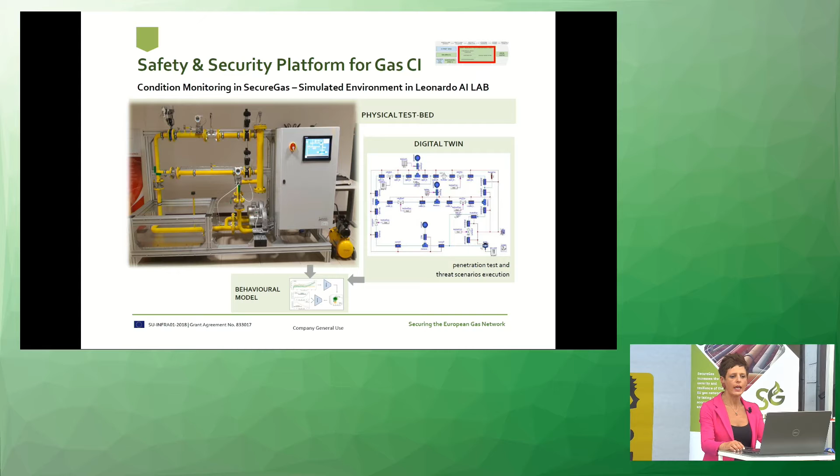That's all on my side. I hope we have more occasions to go deeper into this very interesting topic. I leave the floor to Paolo Corvaglia from RINA for a focus on distributed acoustic sensing. Thank you for your attention. Thank you very much, Rosanna.

So I will briefly talk about the DAS system, which is the acronym for Distributed Acoustic Sensing. We are talking about a distributed monitoring system, which means that the physical parameter of interest is measured virtually at each point along the sensor.

The sensor in this case is an optical fiber, a standard telecommunication optical fiber, which is laid down for tens of kilometers along the pipeline, and which is converted by the DAS technology into an array of thousands of virtual microphones, allowing real-time monitoring of acoustic events happening close to the fiber.

Which is the physical principle behind it: the interrogator injects a pulse of light into the fiber. Then the sound waves, which are actually pressure waves, locally deform the optical fiber, inducing very tiny changes to the light path. From the analysis of these changes, we can trace the features of the acoustic event which caused the perturbation.

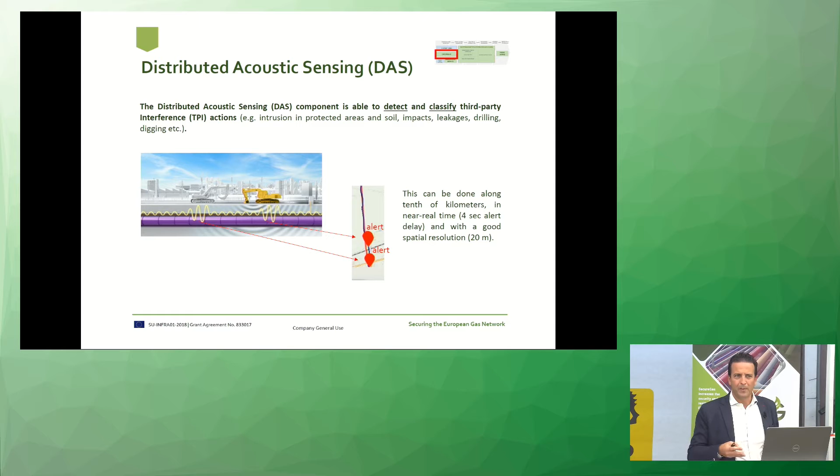Good afternoon, everybody. I'm Francesca Iuele, and I'm going to talk to you about the geohazard assessment component.

Then there is the so-called hindcasting model definition, and in this phase first the rainfall thresholds are defined. A rainfall threshold is an empirical law aimed at identifying a critical rainfall, one that can produce a landslide event. In this stage, we also define the possible landslide propagation scenarios based on the hydrological model of the area at study.

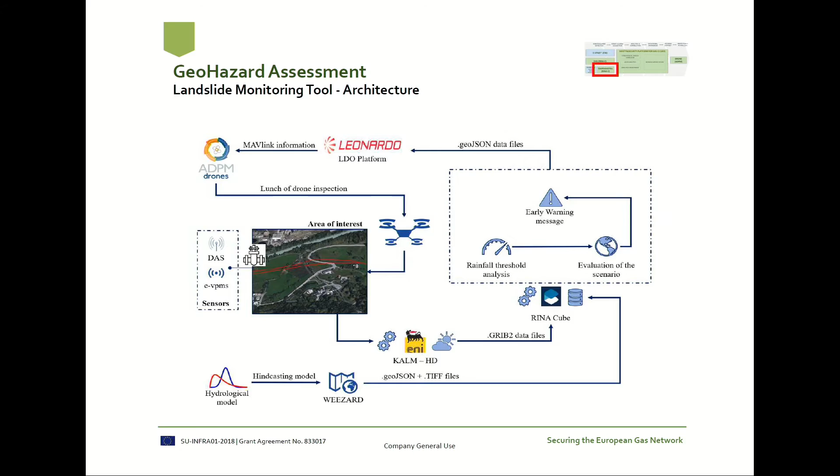So this was the architecture of the tool at a glance. I thank you, and I leave the floor to my colleague for the next part.

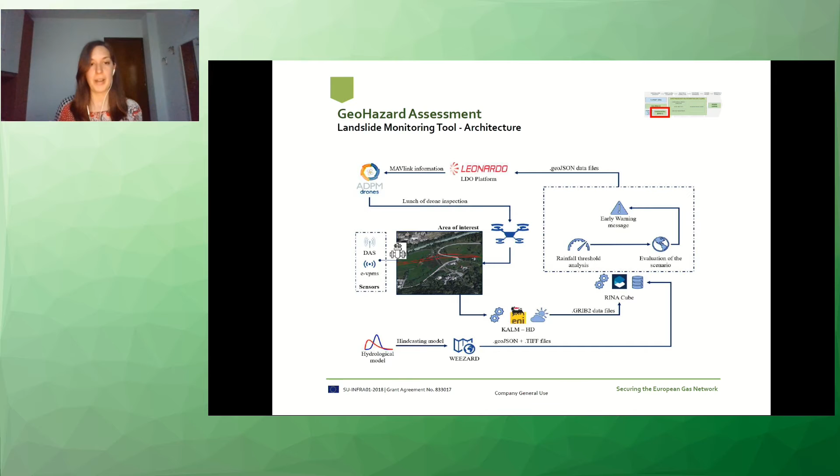Hello, I'm Luca Brizzi from ADPM Drones, and with the next slides I'll quickly present the solution for the automatic drone management system developed by ADPM Drones.

As you know, drones can be used efficiently in multiple scenarios that we have divided into some macro areas like safety, telecommunication, insurance, infrastructure, and agriculture, and we can summarize them as monitoring and safety.

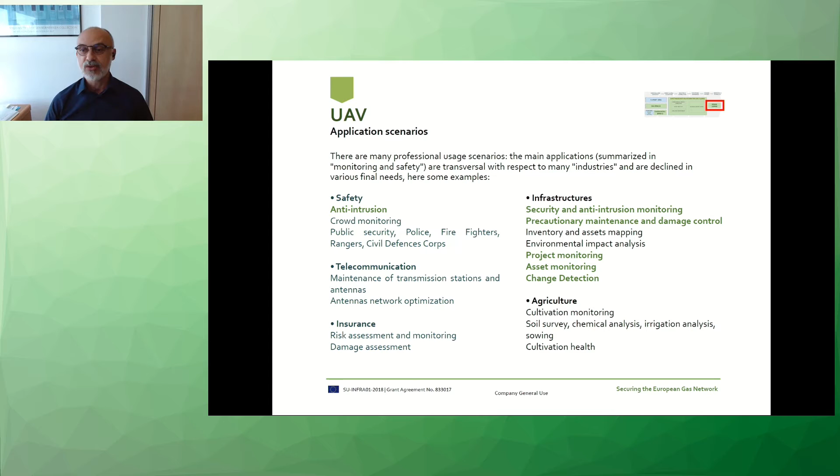For the SecureGas project, drones are used for the operational scenarios highlighted in green here, including security, anti-intrusion, and asset monitoring.

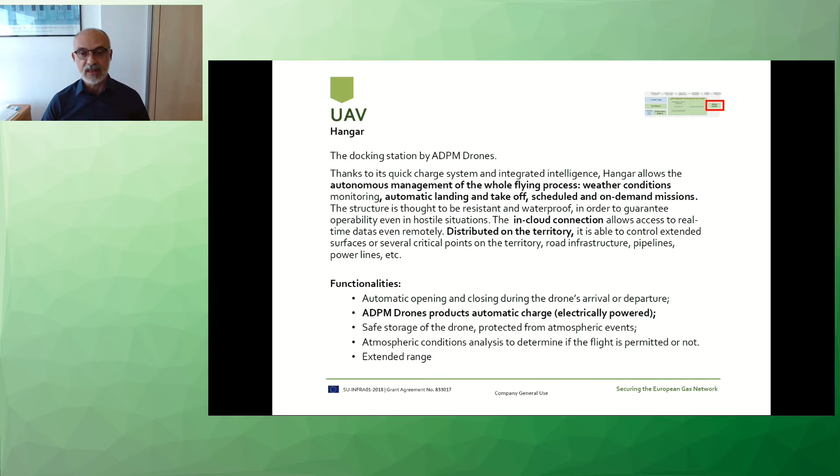Thank you. Behind the hangar system, there is a communication architecture, both with satellite and terrestrial system, and data management that allows its integration in the different operational scenarios and the business and application procedures.

Thank you very much. Hi everyone, I'm Simone Cesari and I represent with my colleague Giuseppe Giunta Eni in this SecureGas project, Business Case 3.

First of all, I'd like to spend some words about the pipeline where we are deploying the SecureGas infrastructure. We are in northwest Italy between Chivasso and Aosta. The gas pipeline is more or less 100 kilometers long with an internal diameter of 16 inches. The pipeline was formerly used to transfer crude oil, but after 2015 it has been inertized and filled with nitrogen at about 6 bar.

For SecureGas business case, we have subdivided this pipeline into two sections. The southwest section we have used for the scenario of third-party interference and leak detection. The northern part, towards Aosta, has been used to host the geohazard scenario.

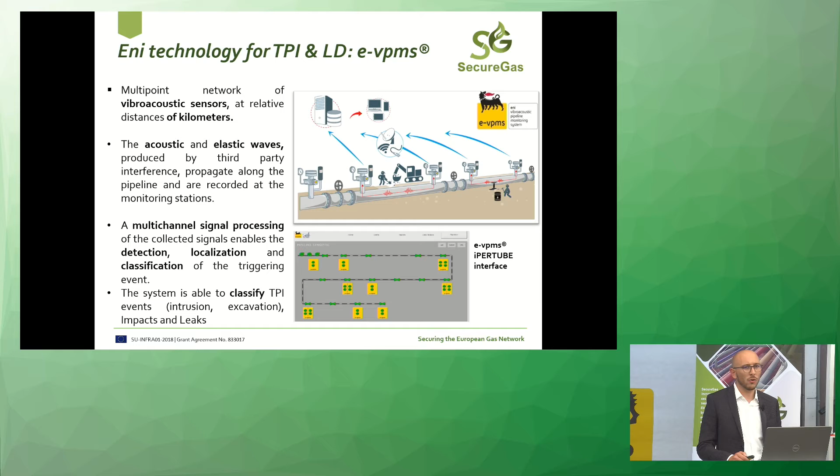What is important here to see is that e-vpms is able to detect and classify the event we are talking about. So the e-vpms is able to say if we are experiencing an intrusion, an excavation, or an impact, or even a leak. The second technology here I would like to show is Eni Kassandra Meteo Forecast.

It is a high-definition model for northwest Italy. It is a 60-hour forecast model, and the model is able to predict temperature, wind, and precipitation, and of course correlates this forecast with the data measured from public stations and also from two weather stations that we installed here in Chivasso and also in Aosta. The weather forecast files are transferred to the RINA geohazard component for the geohazard assessment.

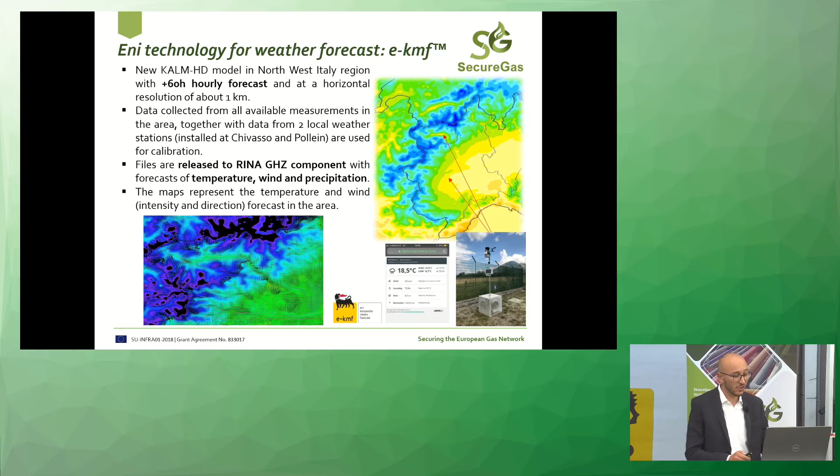Okay, business case 3 has been developed in 4 stages. After a feasibility phase, we had a calibration phase. So we performed a first test campaign last October in order to acquire some data and to calibrate the field layer system. Then we validated the results in a second test campaign. We brought on the field all the components that my colleagues previously explained. And here today we are going to see the live demonstration of the full-scale scenario for TPI and leak detection.

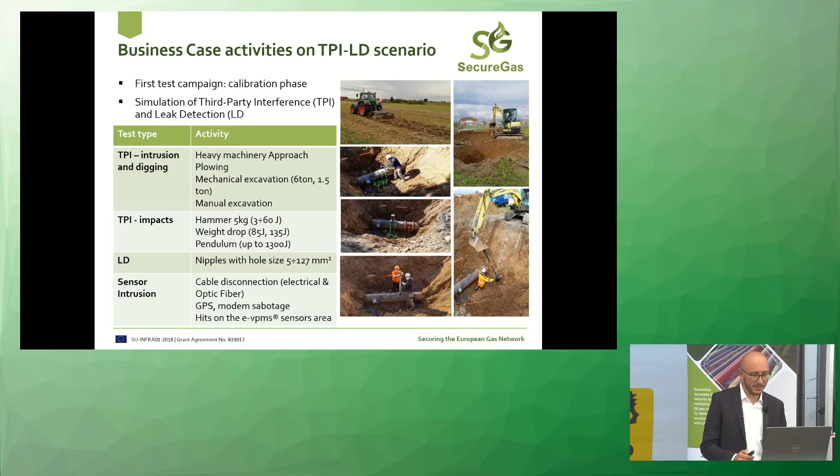Okay, this slide. Let us see what we are now going to see at the test site. The first event will be the excavation, and afterwards the pipeline is exposed, so we will perform a pendulum impact directly onto the pipe, and the third event we will show will be a controlled leak. I didn't say before that a leak could occur in case of corrosion of the pipe, of course, but also as a consequence of the impact. So we will see three different events with different severity.

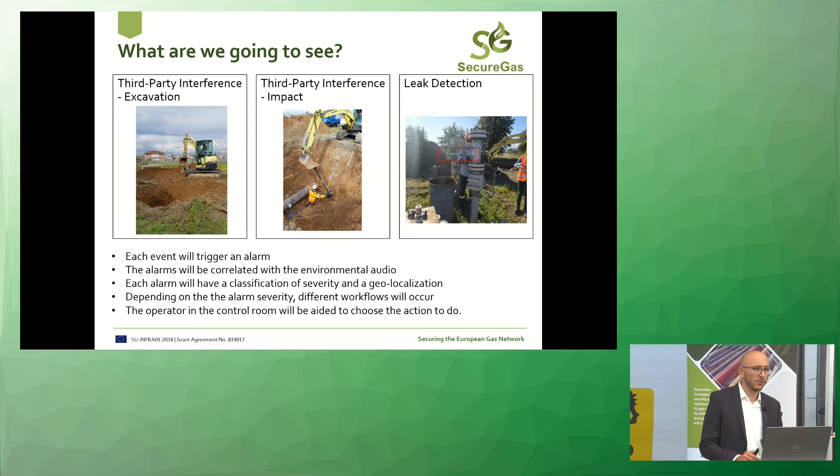Each event will trigger an EVPMS alarm, and the alarm will be correlated with environmental audio and also the alarms coming from the DAS system. All these correlated events will go through the DSS system with the classification of severity and also a geolocalization. Depending on the alarm severity, different workflows will occur, and my colleague who acts as an operator in the control room will show afterwards the possible actions to choose.

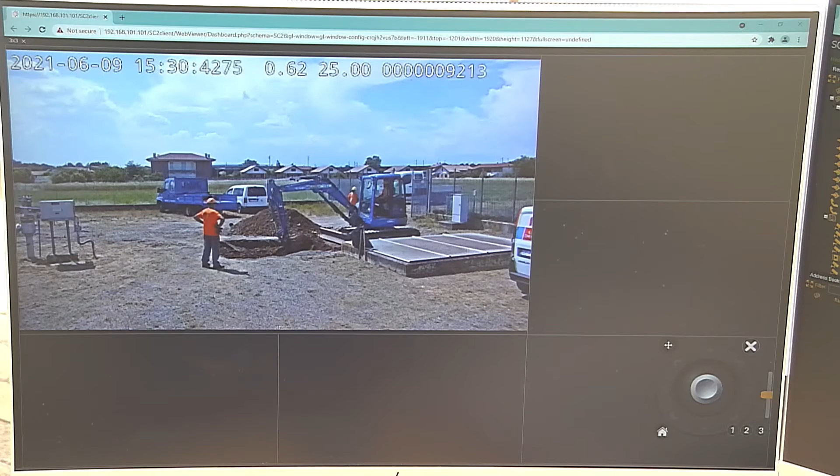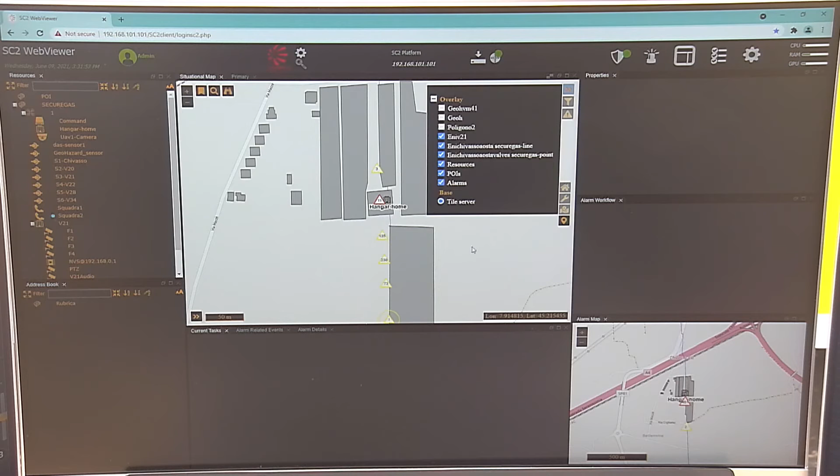You can see that the system is able to collect the events coming from the field, arriving on the screen, and collapse depending on the zoom of the map. Clicking on the collapsed alarm information, you can see all the events on the map.

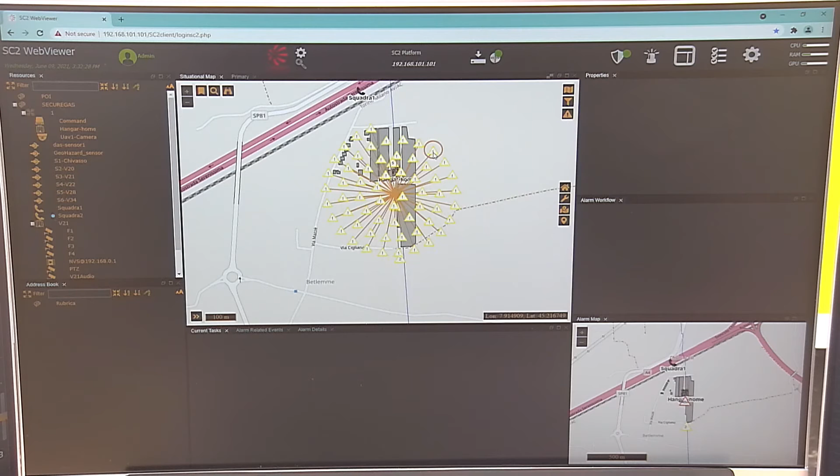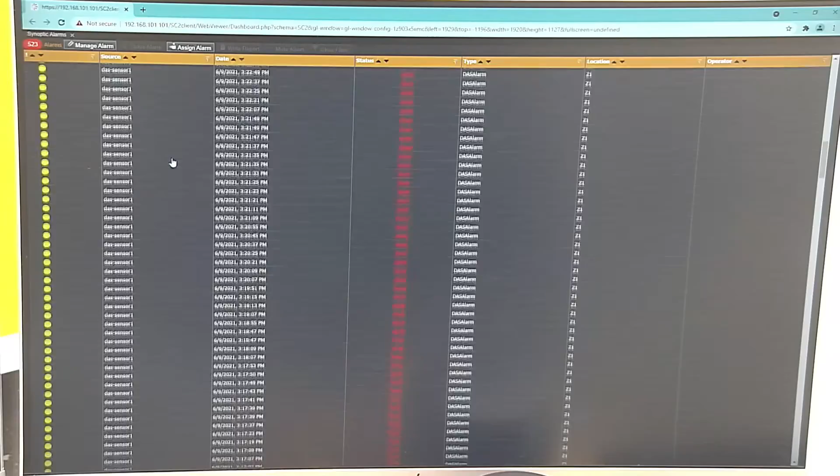The same information related to the events is available on the right screen, screen 3, and you can see different events coming from the field. For this simulation, we take into consideration 3 different types of event with different critical levels. We have the yellow bullet, the events that are not critical at all.

We have the orange with critical level number 3. That means you have a situation that you have to manage, but with a probability of attack that is in principle low. After that, you have critical level 1, where you have a high probability of attack, and the bullet becomes red.

In our simulation, the excavation is orange, critical level number 3, while the impact and the leak situation are critical level 1.

You can select the color of the critical level of the alarm, so you can see the different events as a function of the date, in terms of last date, or in terms of critical information, or in terms of status, because the operator has the information related to the status.

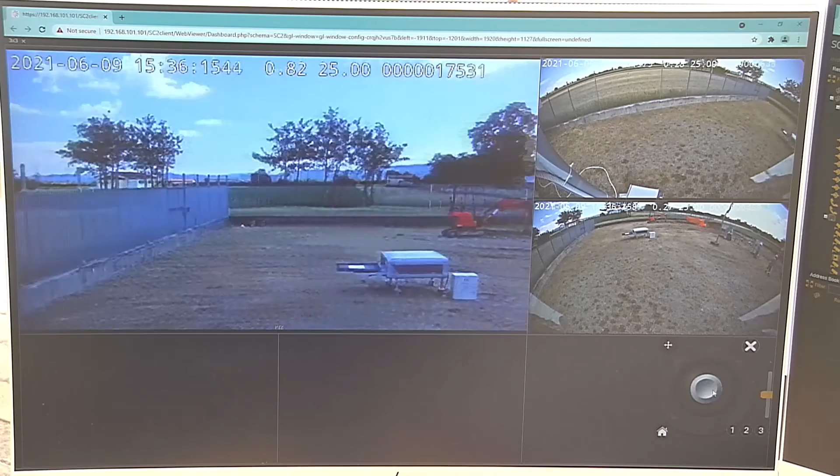On the left side, the third screen, the operator can see the cameras selected directly from the resource tree, and can drag and drop a fixed or PTZ camera or a camera coming from a drone. For the PTZ camera, the operator can manage it directly using a virtual joystick on the screen, or in other applications we use an external joystick on the PC workstation.

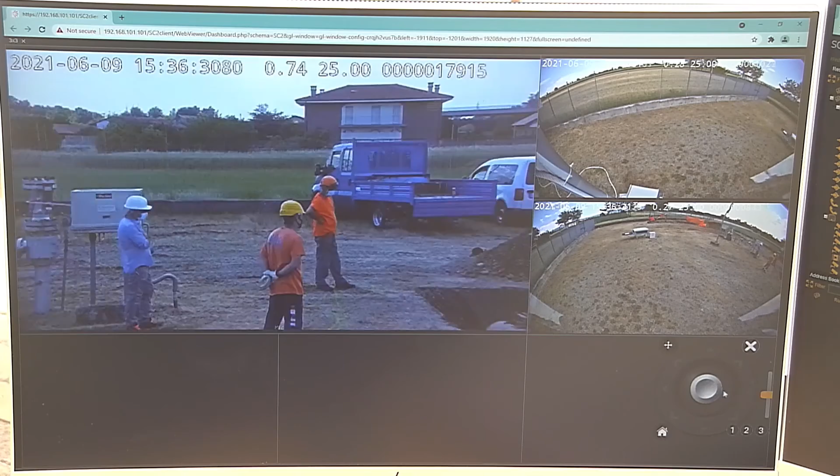Now we introduce the last element of the system, our mobile solution that we saw in use in the first scenario. This solution is a mobile application that in this configuration we use on a tablet, shown on the screen. The app supports login on the system, so only people with the right level of functionality can work with it, and the people on field can manage cameras, see maps, manage workflows, and send alarms.

In terms of cameras, people can see different cameras, and clicking on a camera, they see it directly on the screen. If the camera is a PTZ camera, the operator on field can select the PTZ setup and change different PTZ positions, like in this example, and then come back to the home configuration.

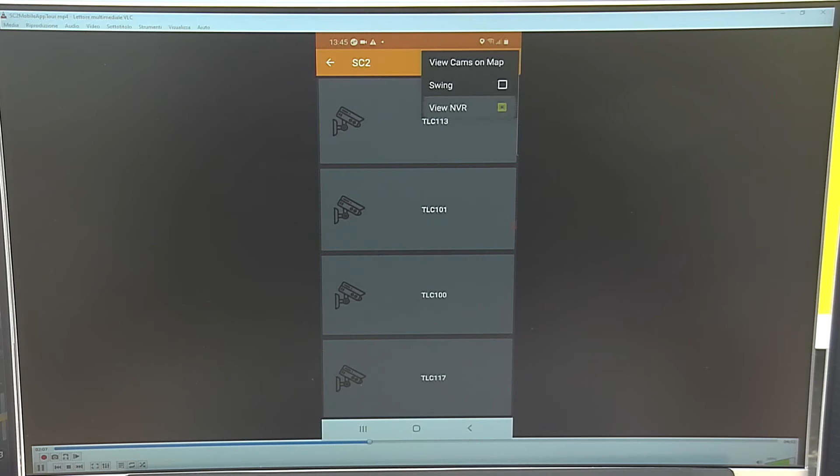Moreover, the operator can see recorded camera footage in order to analyze the situation from the field directly on cameras recorded by the system. Now we can see this configuration.

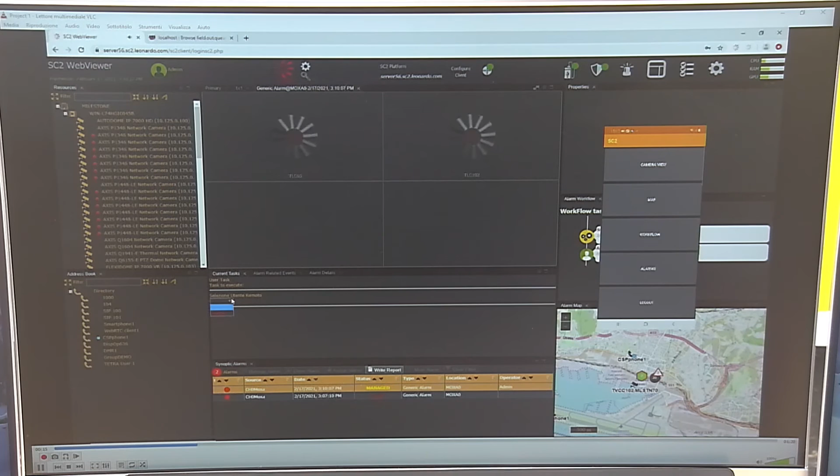Moreover, we see the configuration of the workflow managed by the operational center and the remote subscriber. In this example, you can see the alarm coming into the operational center, and the operator takes charge of the alarm and starts to manage it.

We open 2 cameras and receive the alarm, and you can see that the operator can analyze where the alarm is with respect to its position. After that, it can send the alarm and manage it in a simple way.

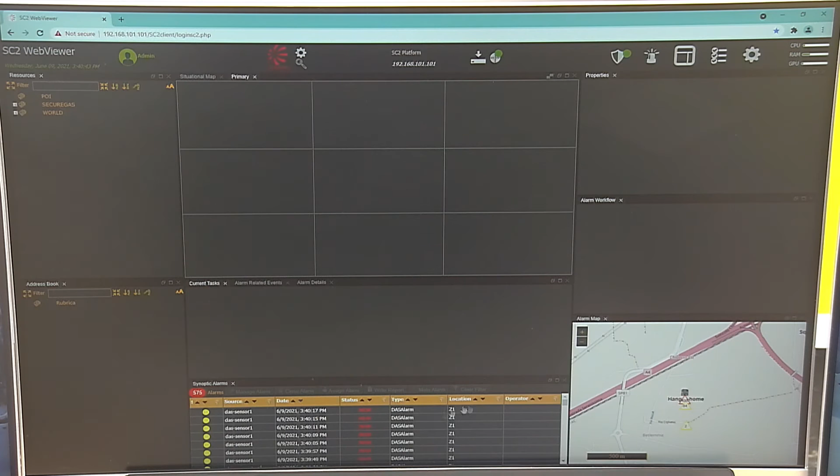Now, sorry, we are waiting for the alarm that has to come from the field.

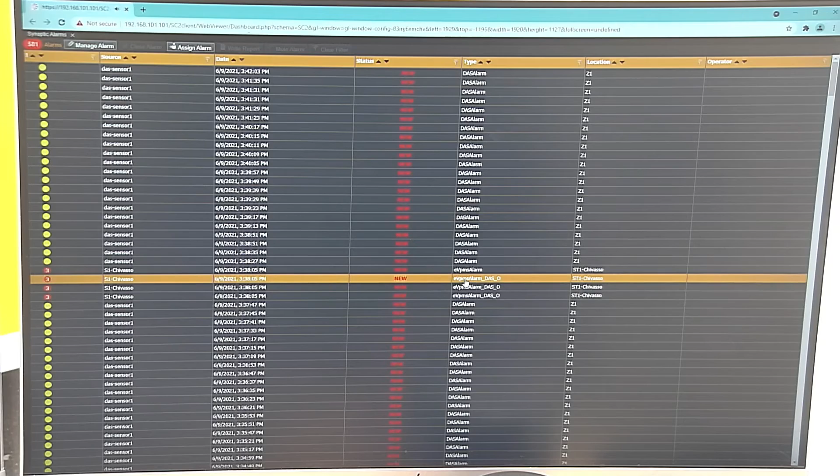Now we are analyzing the first business case, where we have an alarm coming from an excavator, and you can see that the alarm level is 3, and we take charge of the alarm. You can see the type of alarm on the central page of the operator, and the operator can take charge of the alarm and start the workflow to manage it.

At this point, in this simulation, we are working with the remote operator moving on field, which in our example is called Squadra 1. We take charge of this alarm, and after that we select the people on field in order to start the collaboration with the remote operator.

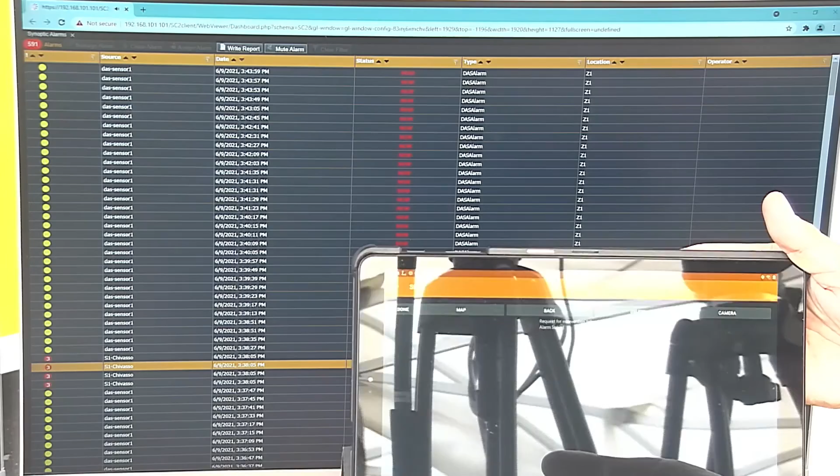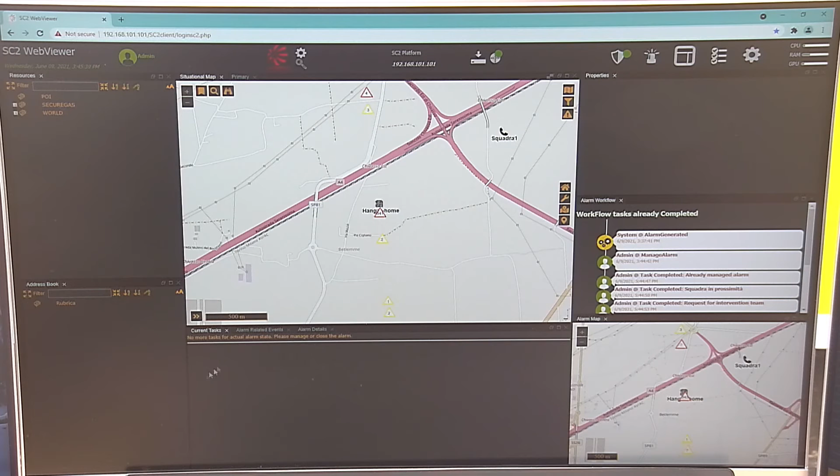The operator received the notification from the Android system. After that, you can manage everything and perform all the activities that are requested from the operational center, and we receive the acknowledgement. After that, you can see on the main screen that the activities are performed by the team on field. So the operator can stop the activity and finalize the workflow. We can close the activity.

Otherwise, if you analyze with the camera and it seems no alarm is present, you can proceed with the workflow. Now we ask to close the valve on the north side and south side, in order to avoid any type of issue on the pipe. You ask for the depressurization of the system in order to avoid explosion or similar. And the last point, we start to use the drone in order to support flying video surveillance.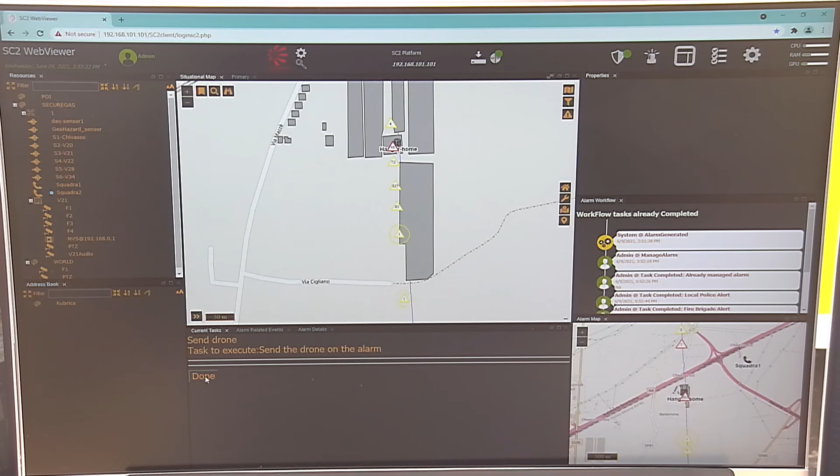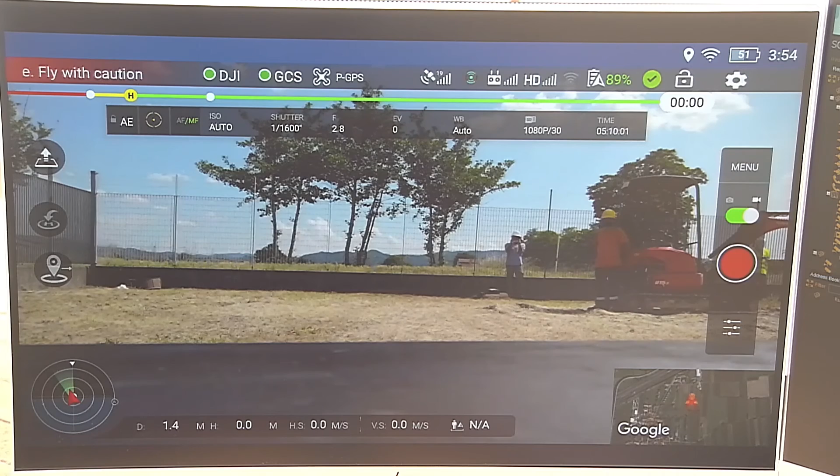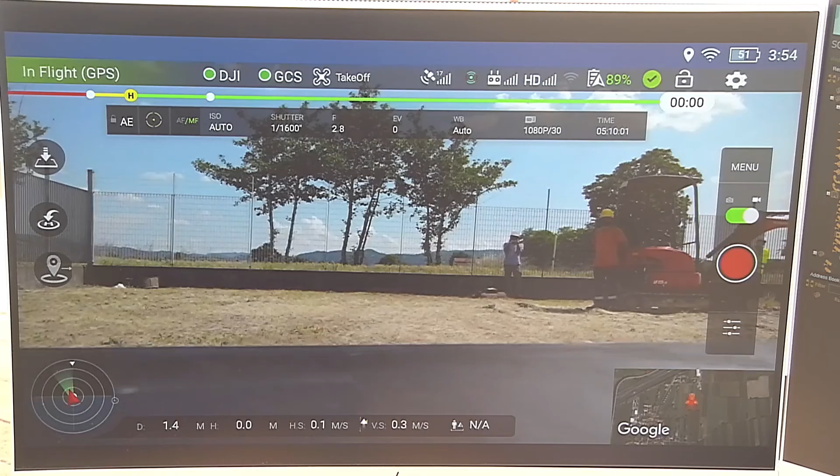We ask the drone system to send a drone to the alarm point that we received from the field directly. And now you can see on the screen the drone that opens the door of the hangar and is moving through the endpoint defined by the workflow, using the coordinates provided by the alarm itself.

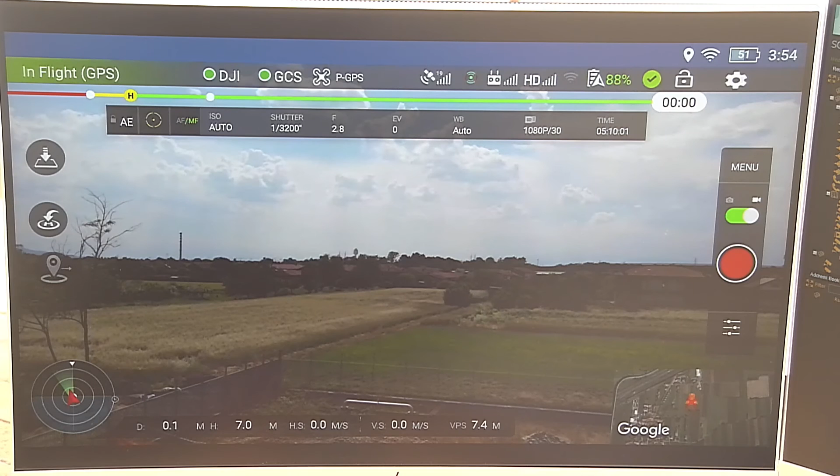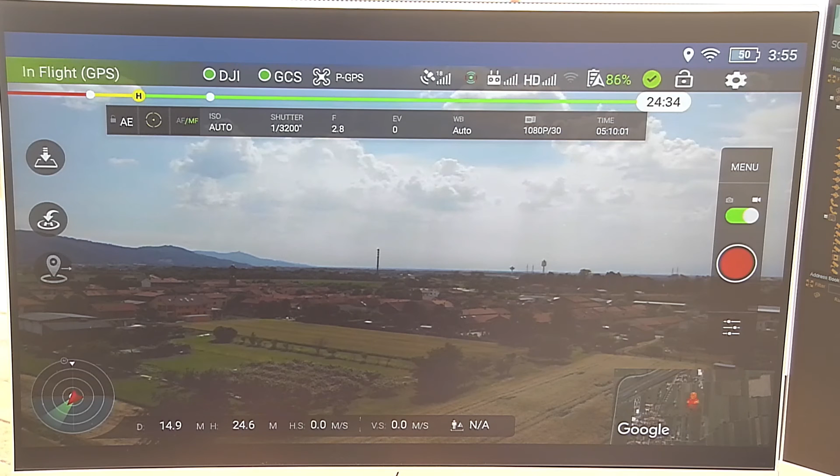After that, you can see in the situational map. You see the alarm and you see the drone icon that is moving, arriving on the final target. After that, when you arrive on the final target, the operator directly on the site or directly on the dashboard can move the camera in a horizontal way or in a vertical way in order to analyze the situation in large field of view or in short field of view.

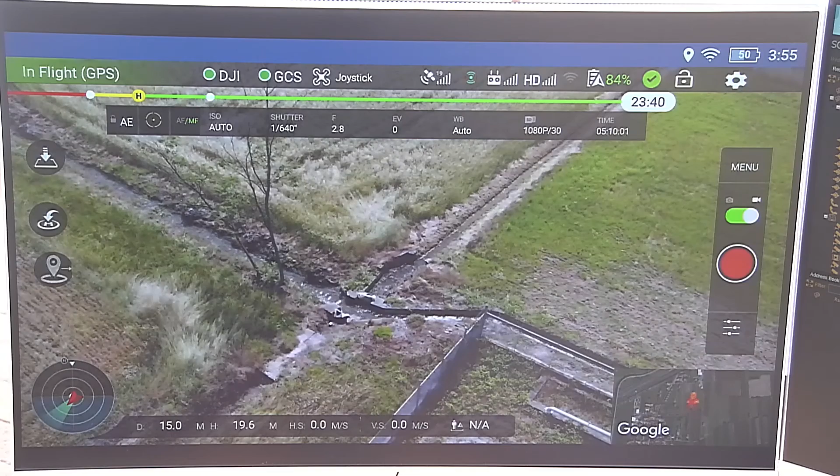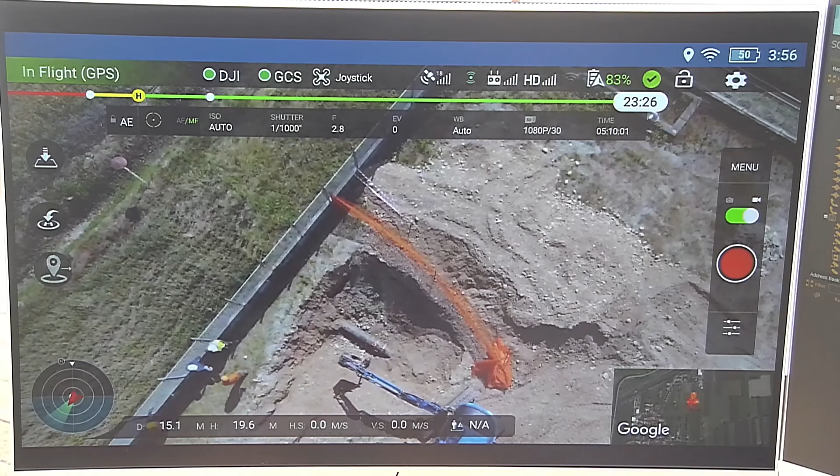Now we are analyzing the large field of view. In that way, we can see if someone is moving away from the target and trying to go to some hidden place. Otherwise, I can move in a vertical way. I can analyze what really happens on the target directly from the vertical side.

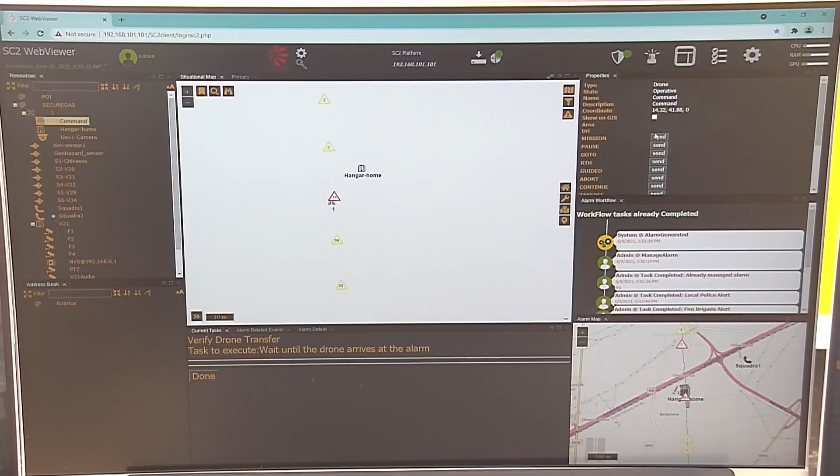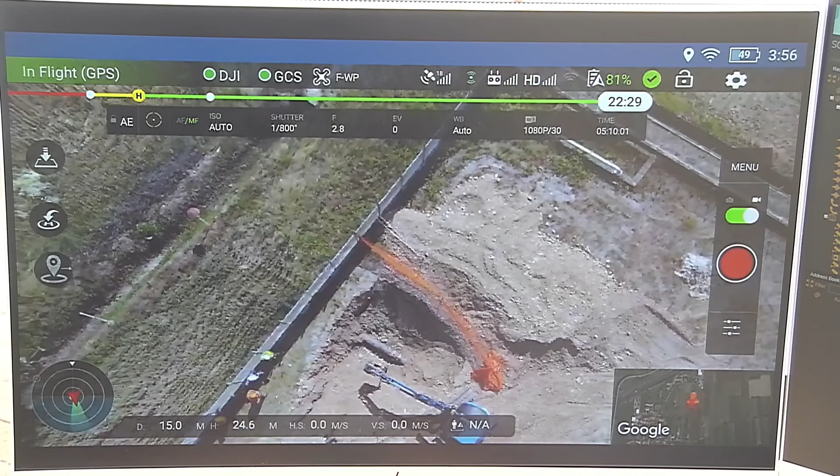When I finish analyzing the situation, I can send the drone to start a mission. The mission in that case is a simple round trip around the site. In that way, I can control continuously if someone is present or moving around the site. And during the mission, I can move the cameras again if I want, horizontally and vertically, in a long field of view or short field of view.

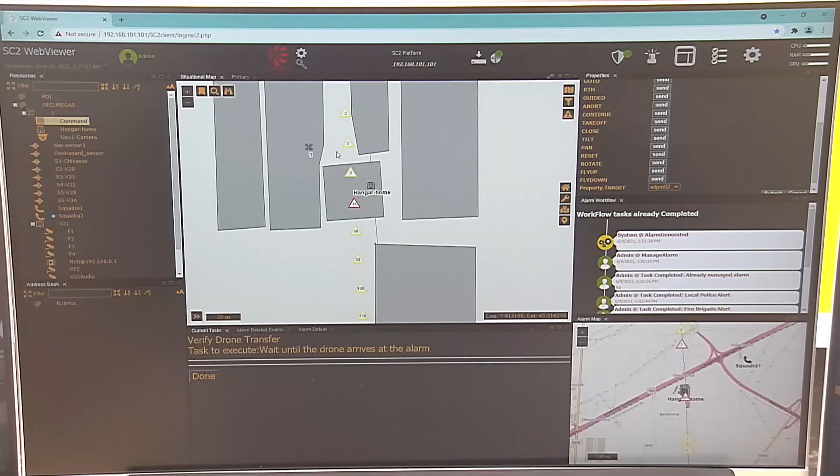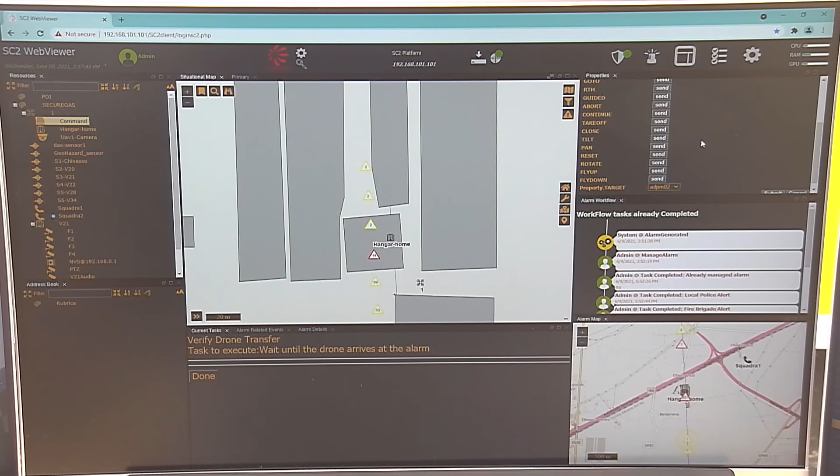And after that, when I finalize all the analysis on field, I can decide to stop the mission of the drone and ask the drone to come back to the hangar. If you want to come back to the hangar, please. In any case, you see on the map the icon of the drone moving around the point of interest. For your information, all the coordinates related to the trip of the drone are stored in the operational center in order to be analyzed during the investigation and verification phase in post-analysis.

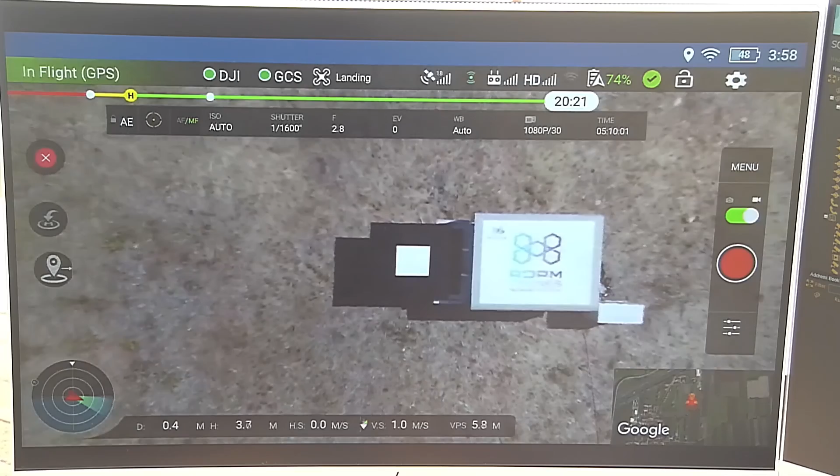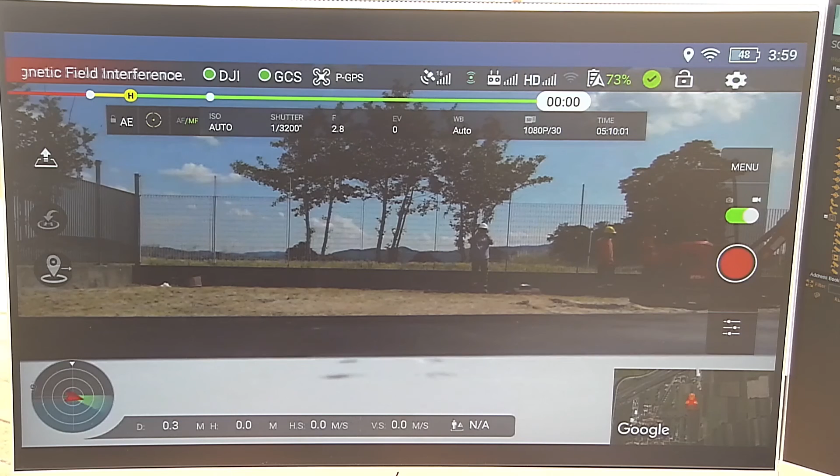Now we are stopping the mission, and you can see the drone going down to the hangar. The drone is landing in this moment, you can see on the screen, and in 1-2 minutes we can see the hangar closing. When the drone arrives in the hangar, the operator can close the workflow and finalize the management of the alarm.

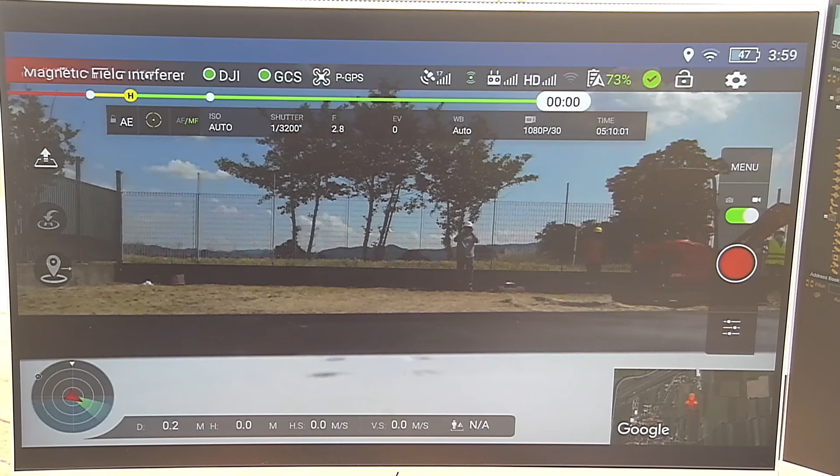And now we are going to see the third type of event. As I described before, it is a leak simulation event. And now the camera is approaching the valve. The operator is opening it in a few seconds.

Okay, we just hear the noise coming from the gas, the nitrogen, so we are in a completely safe condition. It lasts 1 second, just not to decrease the pressure. So now we have, let's say, some time to wait for the processing of the system.

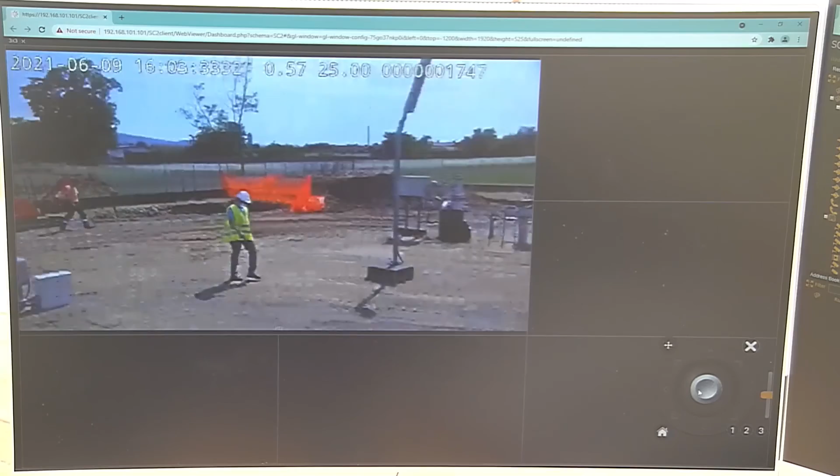And as before, we are expecting a very severe alarm, so a red alarm coming, and then the same workflow with the drone, with the possibility of recalling the police, fire brigade, and also closing the valve, and also depressurizing the section on the test point.

Just to say that now we have just performed a test with a nipple of 0.25 inches of diameter of the hole, but in the test activity we used several sizes of holes, and also several shapes, the round shape and also the linear shape. So just as information, today we are going to see just one of the multiple events we have simulated in the past.

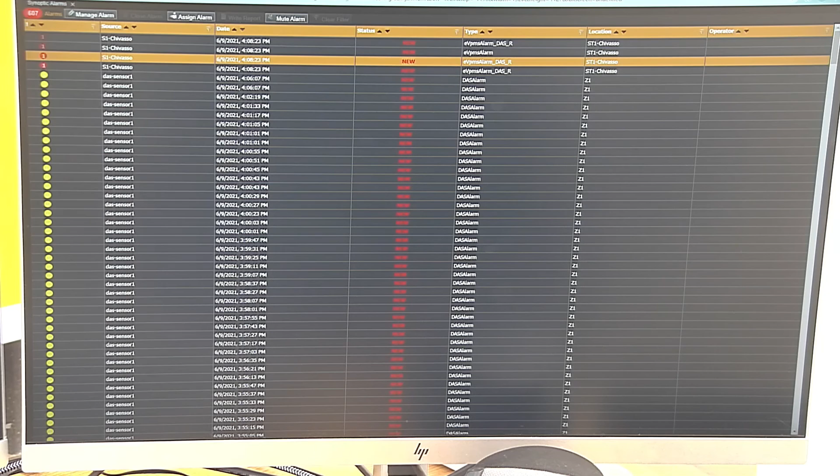A leak alarm arrived some seconds ago. Now the operator started to manage this type of alarm. This type of alarm is again a critical alarm, and the configuration of the workflow remained the same as on the previous one related to the impact.

Prendilo in carico, vai. We start to take in charge the alarm.

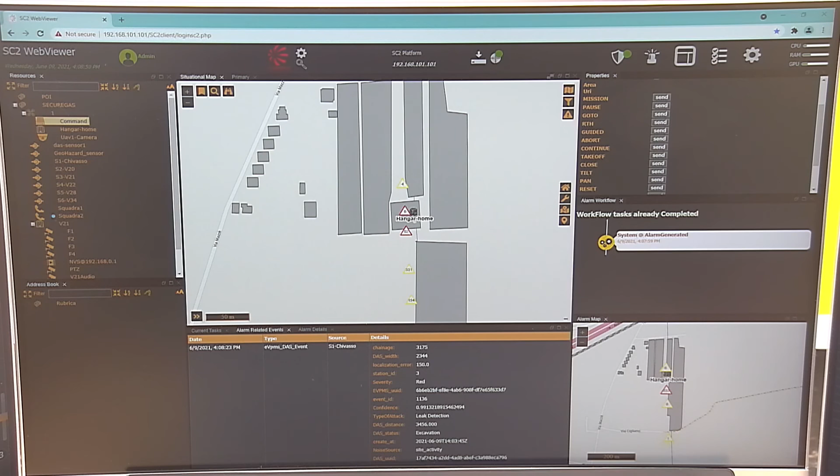Okay. You have again the possibility to contact the police in order to send people of the police force on field, or the fire brigade alert. In that case, you can send the fire brigade if you see fire on field or you have the possibility to have an explosion.

After that, you have the possibility to ask to close the valve, the north and south valve, and to put the pipe in the depressurization situation in order to avoid any type of possible explosion. After that, we start with the drone survey. And again, you can see exactly the same situation as shown.

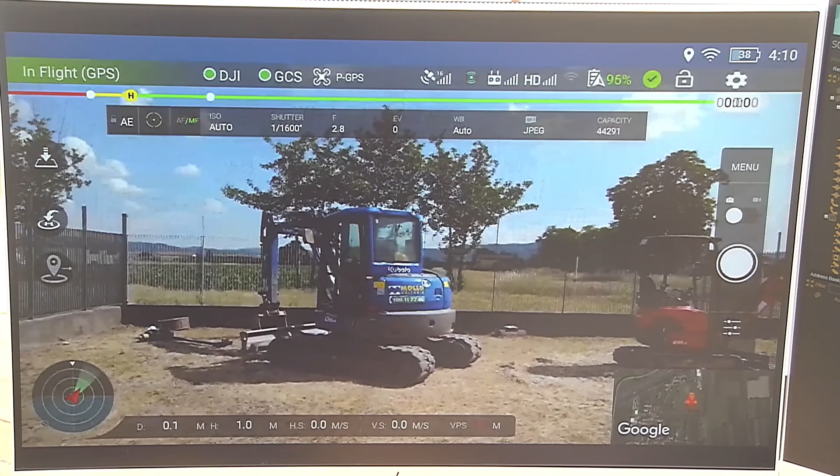The difference is typically that the precision of the alarm in the previous case and in this case is a little bit different in terms of position, but in any case, now you can see the door of the hangar that is opening, and the drone starts the flight to the final target. The command is sent from the workflow to the drone system, and the drone starts the flight to arrive at the final target.

During the flight to the final target, or when the drone arrives at the final target, the operator directly on the screen can see the icon of the drone coming to the final target. After that, the operator can start to see the situation in large field of view and in vertical field of view.

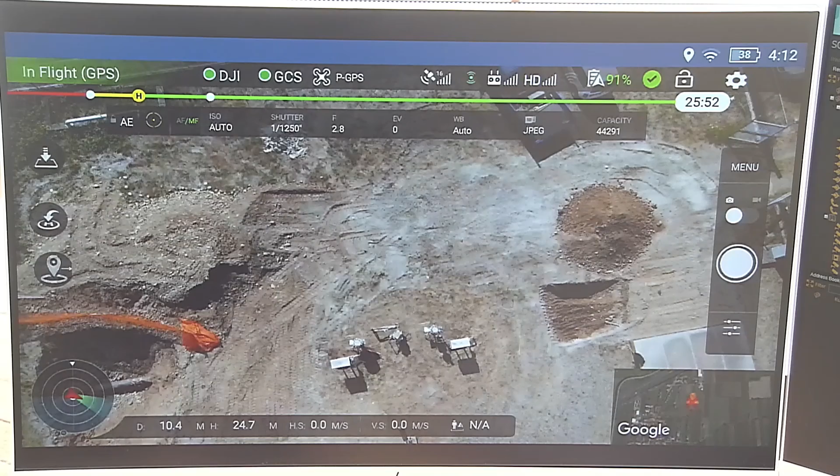In this, we start to move the camera of the drone using the vertical command, and you arrive to see what happens directly on the ground around the final target. After that, when this type of analysis is finalized, the operator decides to start the mission of the drone.

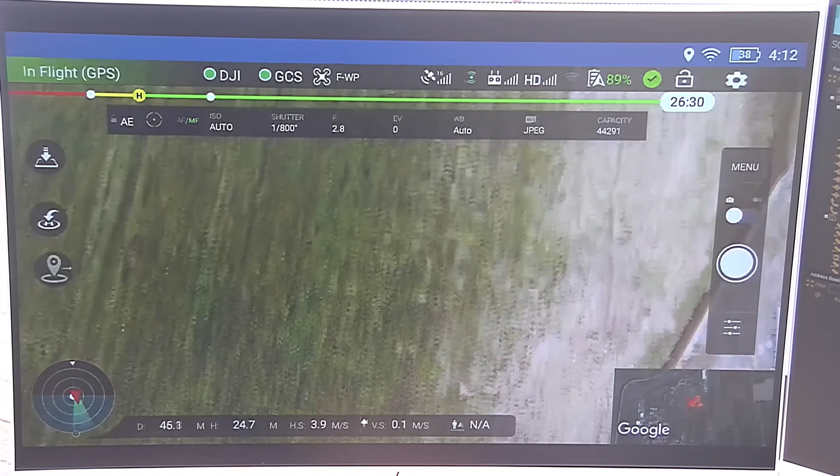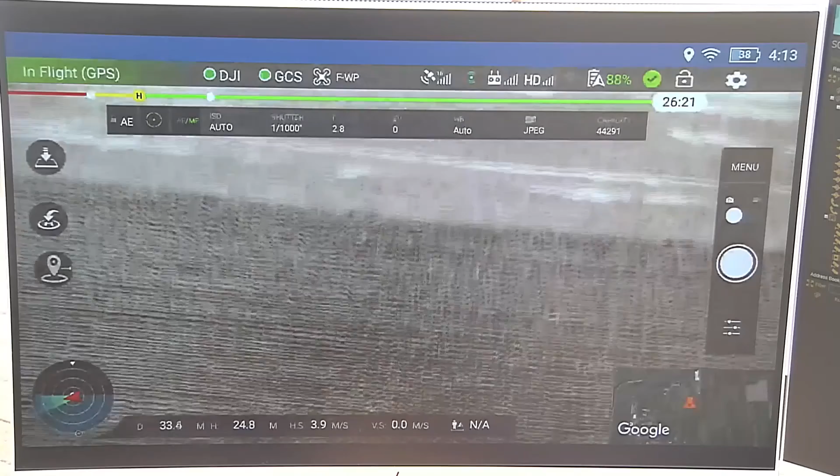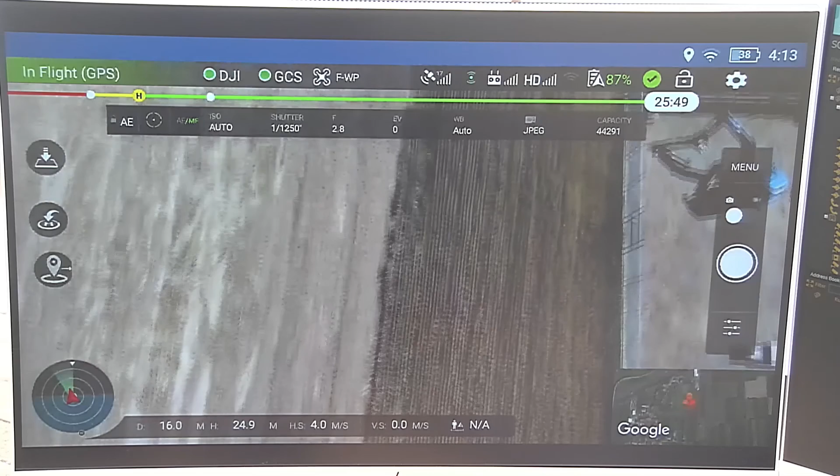The drone, in that case, will move around the site in order to perform a verification of the perimeter of the site. You can see on the map the icon of the drone that is moving, so the operator can see the path of the drone and the cameras of the drone. At the end of this type of verification, the operator can decide to stop the mission and to send the drone to the hangar.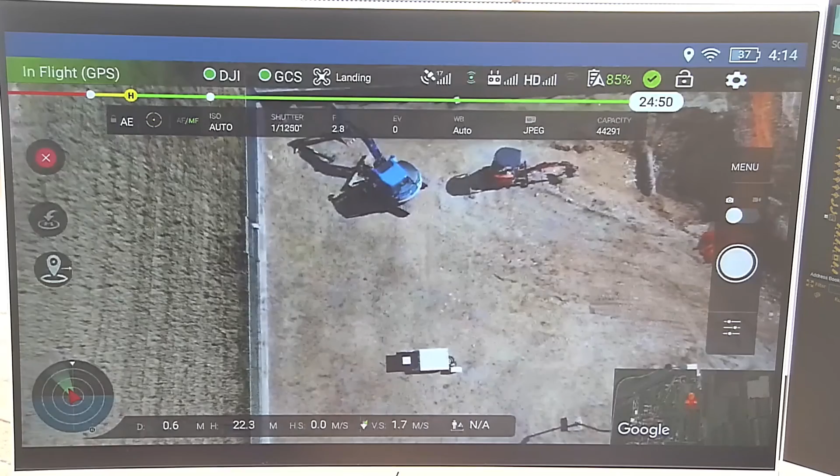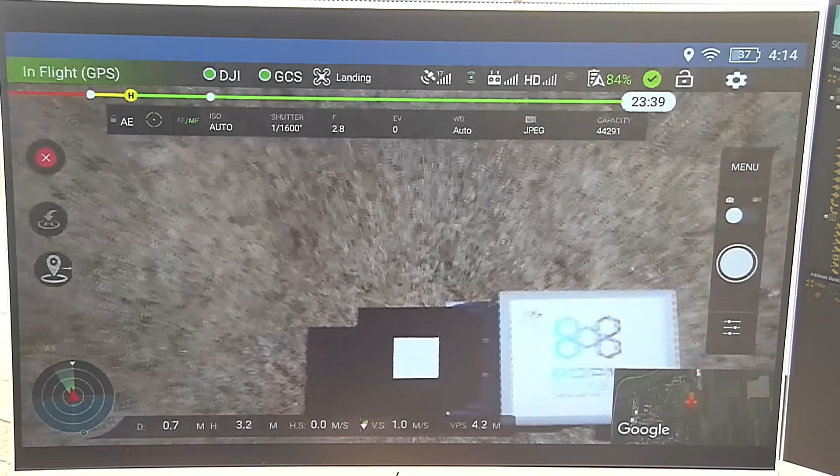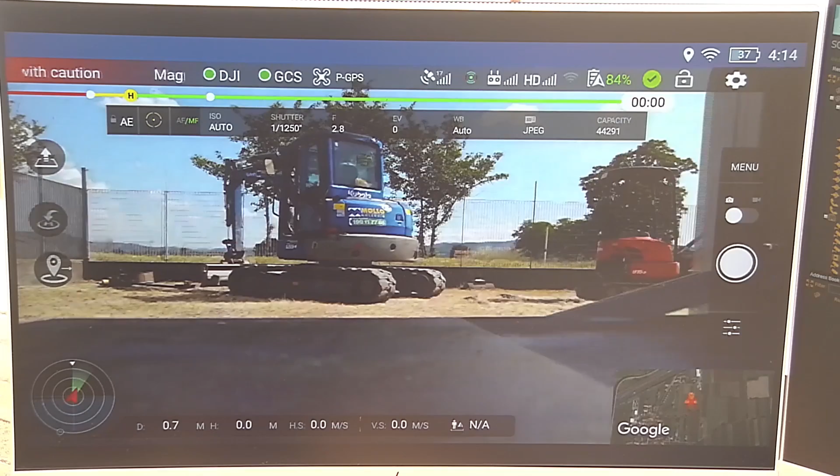Now you can see on the screen the drone that is going to land on the hangar. Okay. Now the drone has landed on the hangar, is closing the door probably, and when the door is closed, the operator can decide to finalize the workflow.

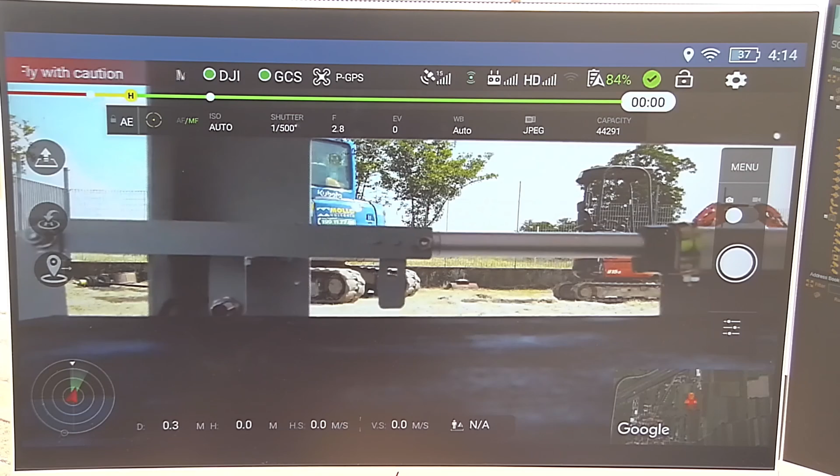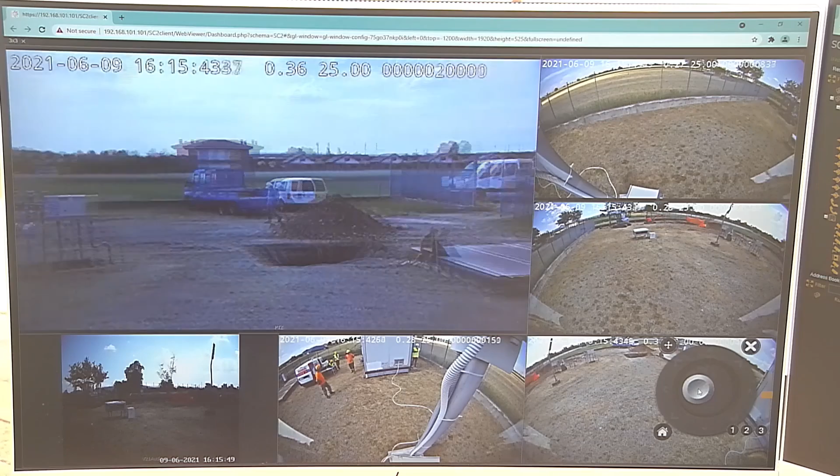Okay, so just to summarize, we have seen three different events with different severity. And depending on the severity, we saw some different actions. All the architecture of SecureGas was deployed in this test site, going from the field layer with the technologies for detection and localization up to the diffusion to the operator and also to the public. So I hope that you enjoyed the three events and the demonstration of the excavation, the impact, and the leak detection.